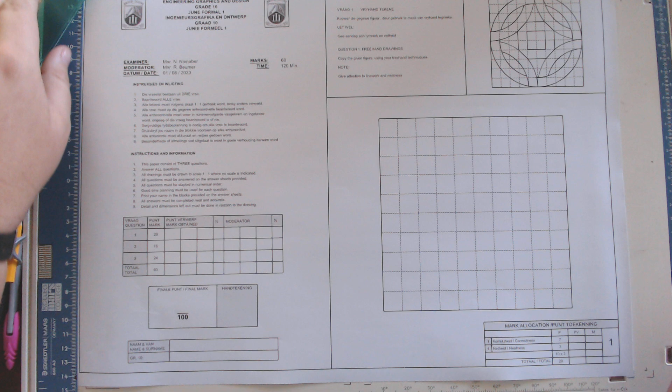So today I'm going to go through an old exam paper of a June exam for grade 10 EGD.

If this is a 2 hours paper, you can practice this and you need to time yourself and see if you can do this in 2 hours. If you can't, that means you need to learn how to do it faster. If you don't practice EGD regularly, that means you're not going to be fast enough in the test.

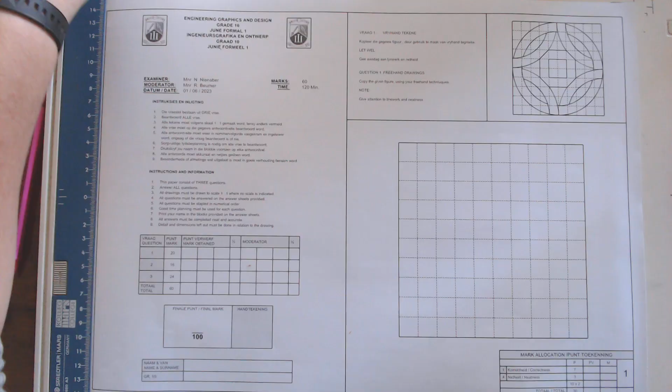For the freehand sketch, you don't use a ruler, you don't use a compass, you use nothing at all. That means you can't use a compass, you can't use a protractor, can't use a ruler, nothing. You can't even use your compass just to get measurements or something. You're not allowed to, okay?

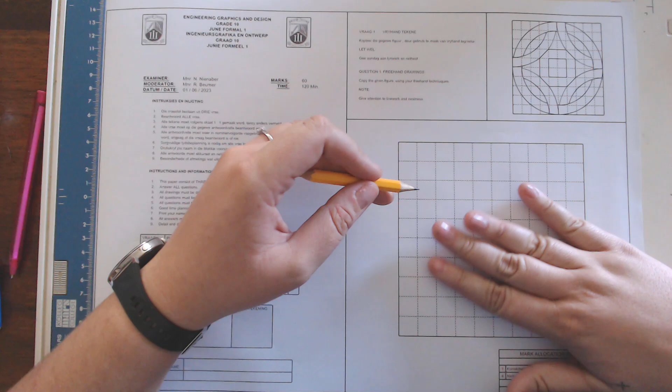So be very careful, we can see things like this very easily.

Now with the freehand, the most important thing is what I usually do, and I recommend you do it as well: you number your sides on your question paper as well as on the paper that you have.

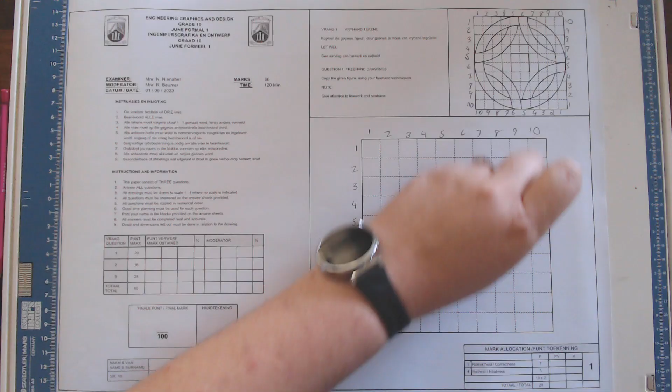Okay, I did it quickly. I didn't do the edge on the side because it's going to be the same thing. I just wanted to explain to you more or less what you need to do.

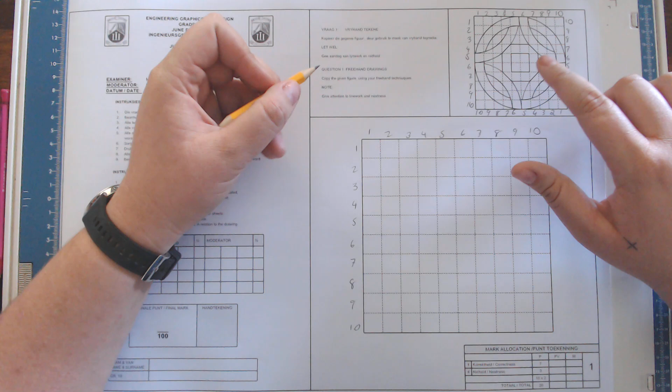Now especially with something that is so complicated with a lot of round edges and things like that, begin in the middle, because that part is straight, it's not difficult.

Now look at your lines, this is the 5 line and this is the 5 line. So I look here, 5, 5, meaning this is where my corner should be, and I can just carry on drawing like this. Now please be careful.

Okay, I'm going to show you the mark allocation now. Please be careful, I drew this in one line, okay? I don't want you to go over it like this, or try to do it like this and then it looks wrong, and then you erase it and I can still see it and you try again. Just do everything lightly if you need to, to start off with, and then you can go darker if you must, okay?

So is that okay, good. Now when you do the curved lines, the easiest way to show your technique is to draw the beginning, middle, and the end of the circular form, the shape.

So let's say I'm going to do this angle here. So I start at 6, I'm going to make a little mark here at 6, how it looks, so it goes just a little bit like that. I'm doing it very dark so you can see, but you should only draw one line, by the way.

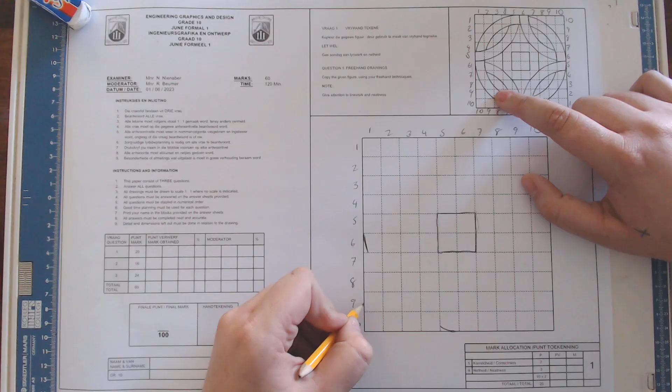So now I know I need to connect it. And then I look at the 9 here, the 9 and the 9. There's from one corner to the next. So now I know how to do that. And now all I need to do is connect these lines. That's it. Okay, so that should be more round, but anyway, that is basically how it looks.

Now let me show you the memo. When you work with the memo, this is how we'll get it. And we'll put your drawing on top of this with a light shining from the back. And that is just easier to see if you are on track and everything like that.

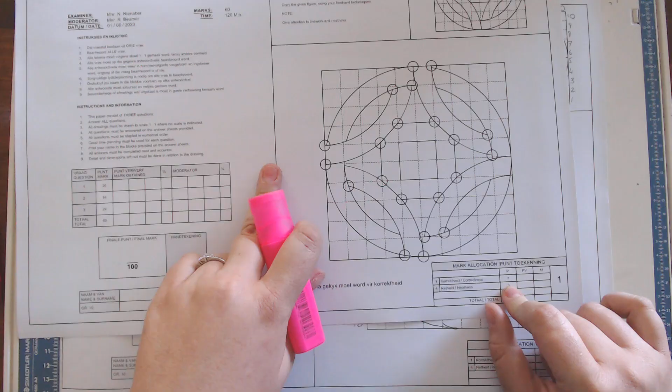Now, if you look at the mark allocation at the bottom, it says correctness is 7. Okay, so when I count up all these marks and things, I think it's going to be half a mark for each area here. Then it will add up to 7. So if you make one mistake, it's fine, it's half a mark, but 2 mistakes is 1 full mark. All right, and everywhere where there's a circle, that's where I look for the mark specifically.

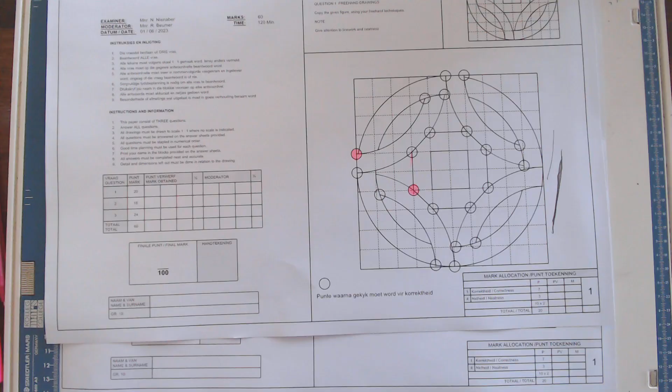Alright, so in this case, this question paper counts 3 questions. The first one is 20 marks, it's the freehand. Then the second question is 16 marks, and the third one is 24. So if you need to allocate your time, try and work with the biggest one taking the most time, and the smallest one taking the least amount of time.

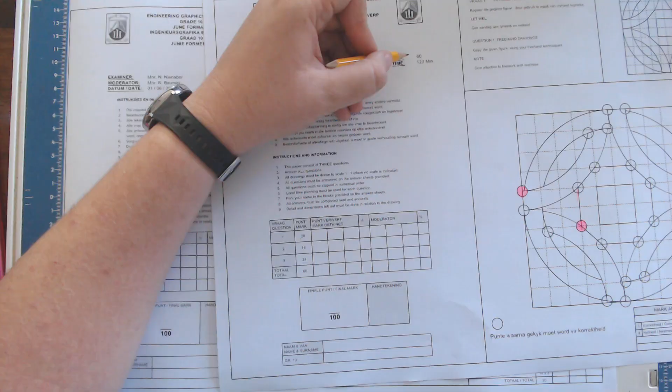And it is actually about technique, right? So you need to exactly know how to execute something in order to save time and not waffle and make a mistake. So as you see, it's 60 points for the question paper, but it's 120 minutes, so you get 2 minutes for each point. And then you can work it out like this, basically.

So, let's say, this one that counts 24, you're going to have 48 minutes to do it. For this one that's 16, you have 32 minutes to finish it. And then this one is 40 minutes to finish it. Okay, and that's how you kind of calculate, and that's why it's important to keep an eye on the time, and to quickly work out how you're going to do this.

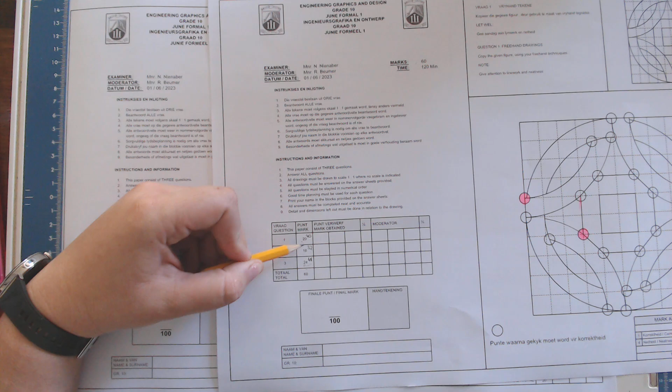All right, you have time. When you do the reading and everything, you have time to see, okay, I'm going to take more time with this, or this is going to be shorter. And also, if you look at the marks, there is a 4 mark difference between these two. And then there's a bigger jump between these two. So, meaning the drawing here, question 3, should take the most time. But not too much, because the others also deserve at least half an hour.

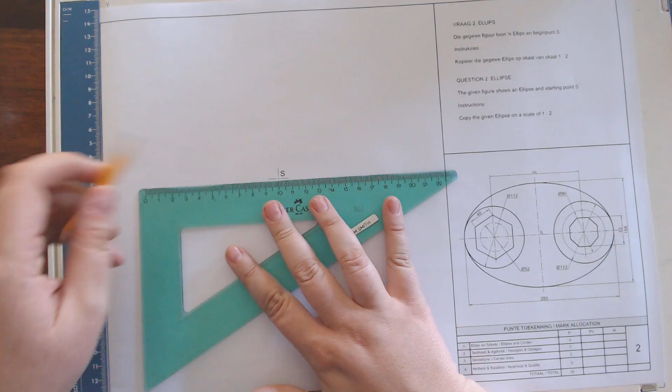I'm just going to do it before I look at anything else, just so I don't forget it. And accuracy is important in this case.

Okay, so it says here, the given figure shows an ellipse starting point at S, so there, and I know that's where my drawing starts. Instructions: copy the given ellipse on a scale 1 to 2.

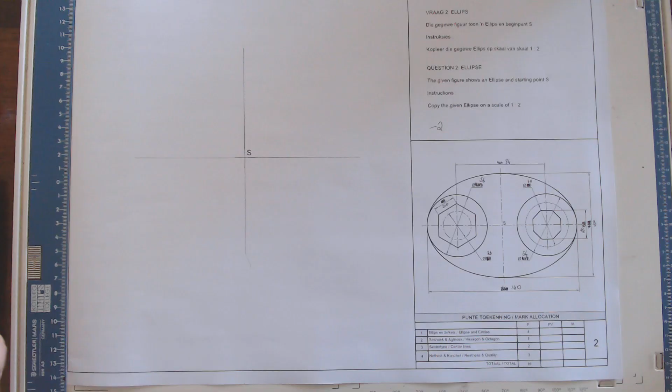Okay, I got it now. So let's get going. First things first, I am going to draw the ellipse itself. It takes the most time, but it's the easiest thing to do once I have it.

Now, because it's 140, that means 70 on each side.

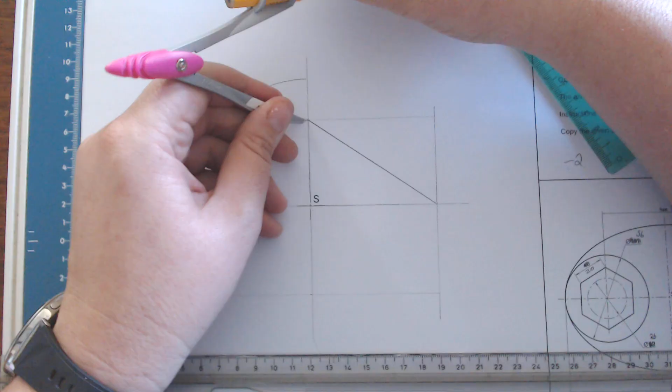Now remember, these circles and all those things, it's really not that necessary. If you can, do it rather in construction lines. You erase it afterwards, because there are things happening on the inside of this ellipse, and if you have too many things it's going to confuse you.

Okay, so once I have my final ellipse, I'm going to draw it in pen, and then I'm going to erase the rest, just for my own peace of mind. There we go, I'm taking it that far.

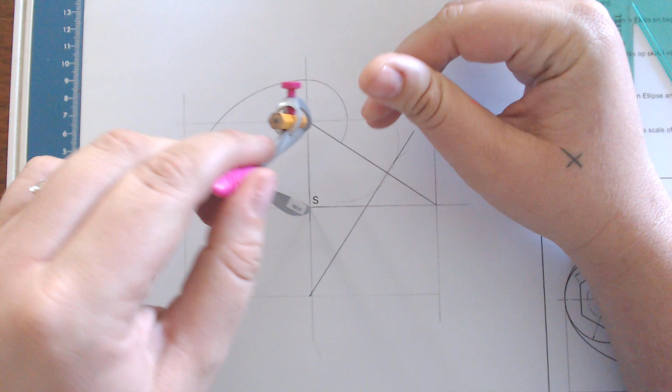Compass, pencil, there we go, on this side. Right, compass, there, pencil there, alright, okay.

Okay, there's my diamond, sharp point, pencil.

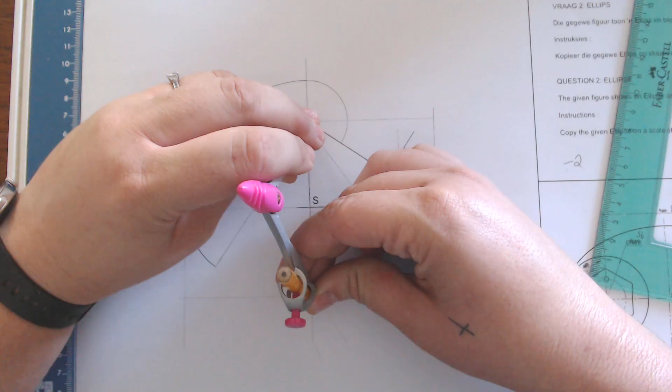See, my measurements are not working out now. It's fine, whatever, it's fine.

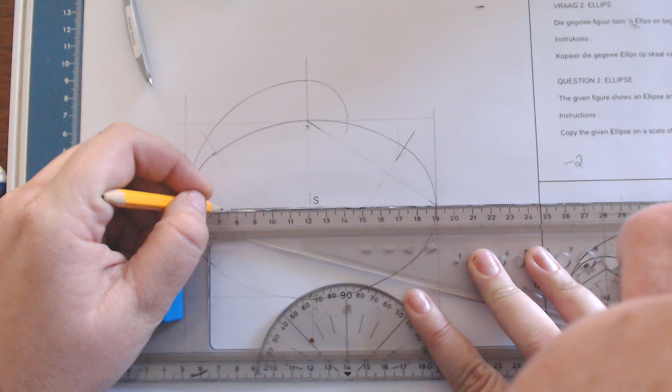So I'm just going to skip ahead and draw my center line so long, because I'm going to use them the whole time. So why not just, you know. The line from the top.

Okay, there we go. There's my center lines. All right, now remember your center lines in the end as well.

Okay, I'm quickly going to draw the two circles, 56 diameter. When it's 56 diameter, it is going to be 28 in radius. So I'm measuring 28 from the side.

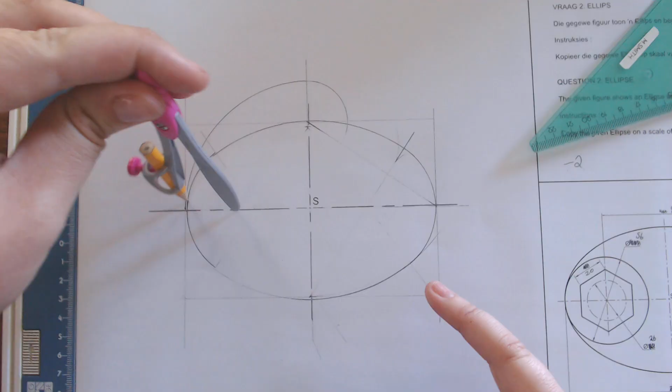I'm cheating a little bit, because they do give you basically the distance between the two circles here, but I know it's going to be overlapping with my ellipse, so I'm just trying to kill time. Alright, and on this side as well.

Oopsie, see, that should not be happening right now. There we go.

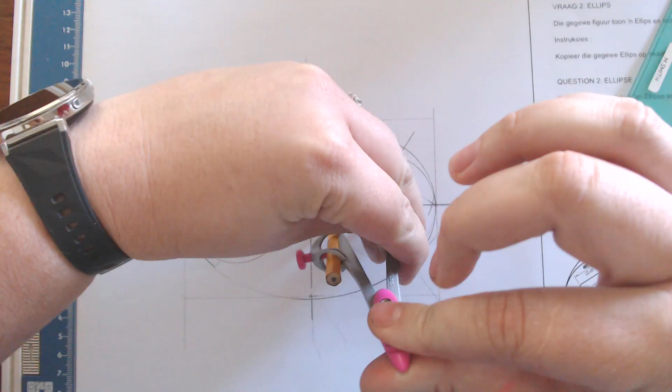Okay, quickly my center lines, because I'm going to use the same center lines the whole time. Short, long, long. Okay, and short, long, long.

Okay, now next step, I'm going to do the hexagon. So if my side is 20, put your compass on 20, sharp point in the middle on your center line.

Okay, and then you are going to draw your hexagon on the inside.

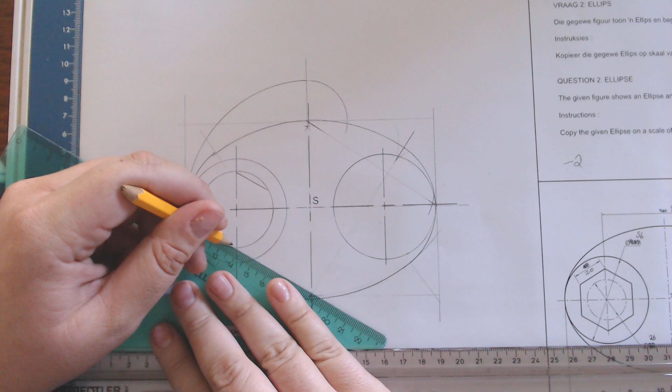It's very ugly, it's not matching up, but it's fine, whatever. I'm doing this for test purposes only.

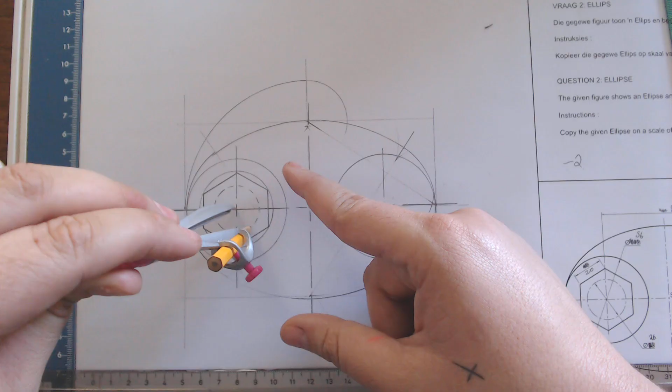Alright, center line's done. Ooh, that should have been long, short, long, short. You see, that's what happened when I rush. I'm trying to get through this video as fast as possible to not waste too much time teaching.

That should be long, short, long, short. Okay, center line. Okay, next step, the hexagon. Where's my other set square? The set square I'm going to use on the sides of this hexagon. Okay, it's 94 in total, right?

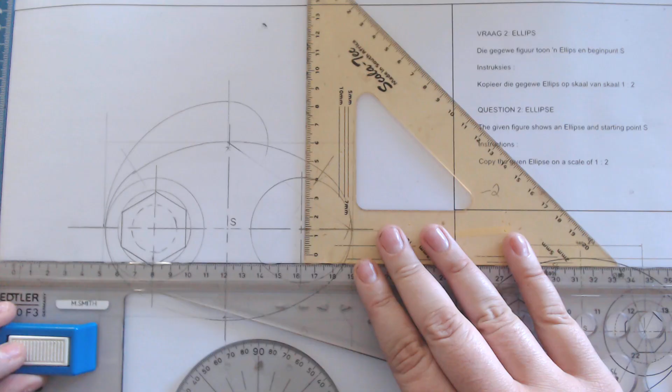No, sorry, it's 26. So it's 13 on each side. I'm quickly going to draw my square. It's 13. There's 13.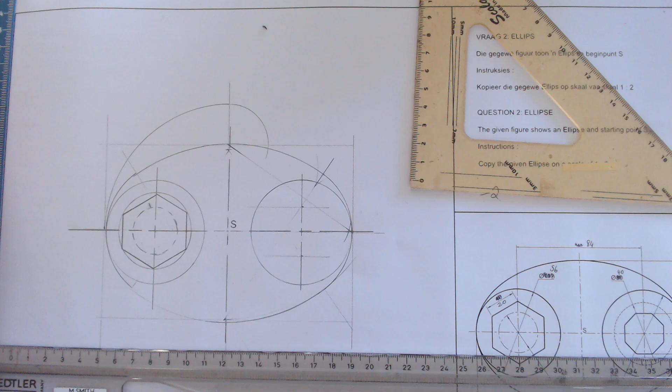26, right. Construction lines, alright. And then I'm going to work inside of this. Let me just do the side as well. It's also 13 and 26.

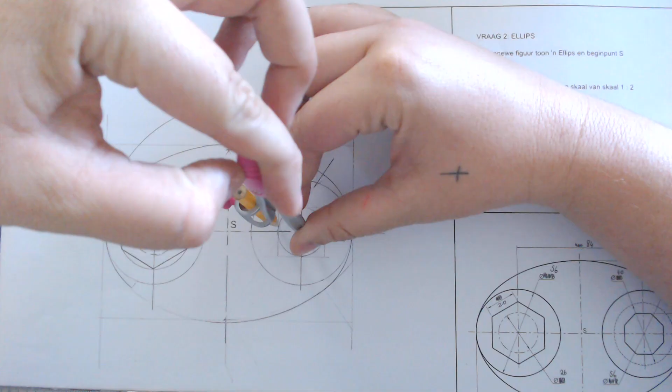Very light construction lines. It's not really crucial on all sides, but anyway, okay, now let's use our set square where they touch. That's where you draw your octagon.

I'm trying to think, okay, let's do the center lines, the hidden detail lines. So diameter is 40, so radius is 20. This one is actually hidden lines.

Now it's equal. I'm going to mark this as if I was a teacher, with all the mistakes and everything I made and all the mess and things, just to show you that even if you did the complete drawing, like properly, you can still lose quite a lot of marks.

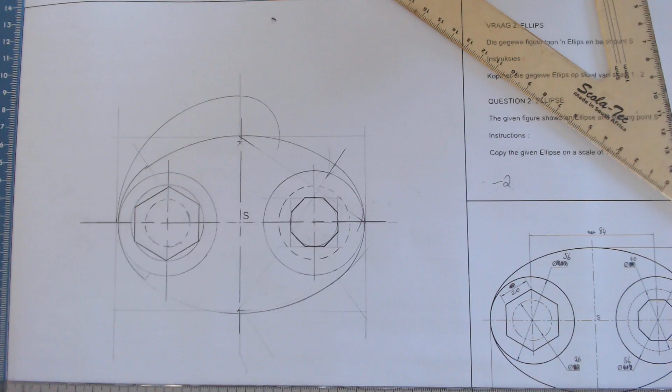Right, there we go. Okay, anyway, let's act as if this is a completed drawing. I'm going to get my memo quickly, and then once I show you, I want you to see how I would mark it step by step.

Okay, that is the question paper, here's the memo, there we go. So you'll see, it's already on the WhatsApp that I sent you with the test, but okay, I'm quickly going to go through it.

So these 2's mean that's for 2 marks, 2 marks, 2 marks, 2 marks, 2 marks, 1 mark for the circle if it's good, and it should be - in this memo it's actually incorrect. This should be center lines, that should be a hidden line. Okay, anyway, let's move on.

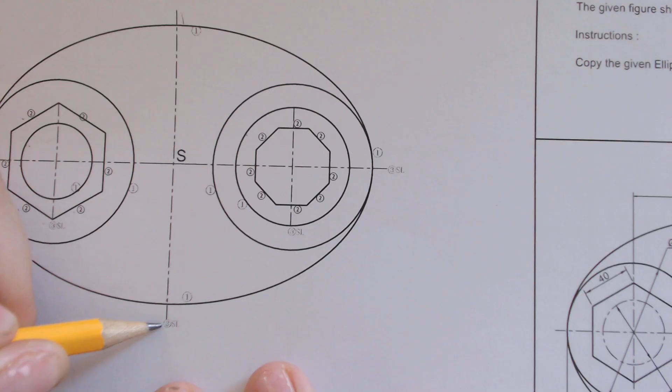So 1 mark for your ellipse if it's right here at the top, 1 mark for here at the bottom. You'll see there is 2SL - that stands for 2 marks for center line. So if you look at the mark allocation, the center lines is 2. Alright, you get 1 mark for over there.

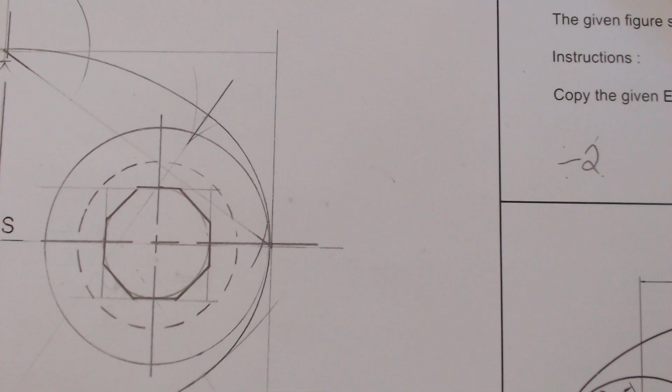I look at that. I look at the center line that you give here, center line that you give here. Alright, so let's quickly have a look. I'm going to mark it very briefly, just so you can see. Alright, so first things first.

Neatness - I would not give a good mark because the lines are different here and here. You see how dark and light it is? It is going over the measurement there. There is weird lines that's still remaining there, because I erased it. There's weird lines still there. And the thing is, it's a neatness issue because it's just as dark as my actual drawing.

So even though it should have been construction lines, I would look at the lines here that I made. I mean, there's just a lot of nonsense going on. And over there, it's unneat. Alright, if I was strict, and I kind of am, I'll give a 1 for neatness. Okay, 1 out of 3, it's not good.

Then your center lines. I'll give marks there, and that counts 2, for center lines.

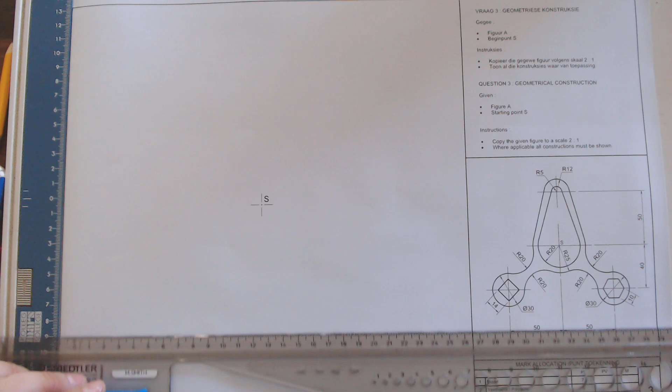Okay, granted, I didn't do the freehand drawing completely. First things first, let me just get this set square out.

It says there, they give you the figure A, that, and starting point S. So I know that's S, that's where I start.

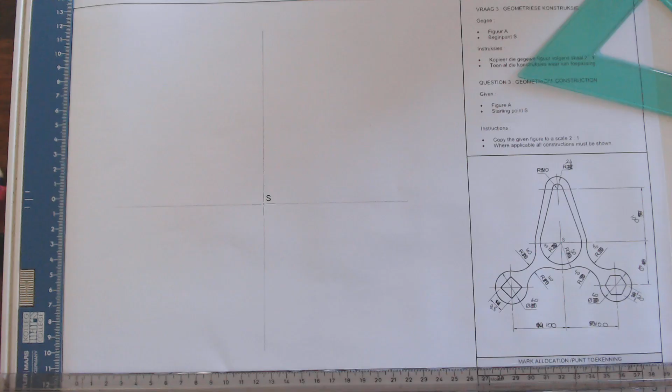So I'm going to start with this circle that I have here, radius of 40, so I'm taking my compass, radius 40.

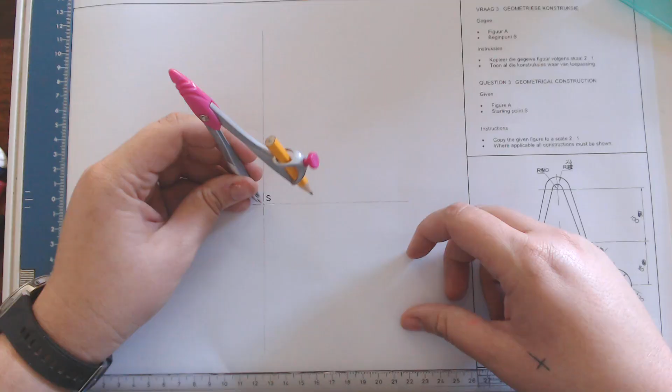I'm going to do it lightly first, so I can erase it if needed and where I need it. So there we go, that is 40.

And now I'm going to do the top one. Between the top and S is going to be 100, so I'm measuring 100 quickly.

Then I'm going to do the radius of 10 and 24. Well, first I'm going to do 10 because it can match up with the circle I just drew. That's very small, I hate small circles.

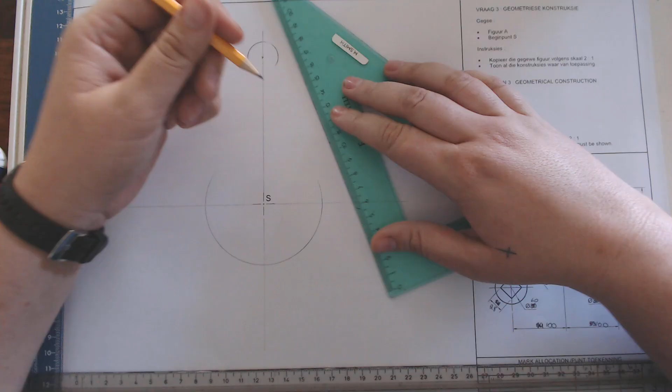Now to connect them, what I'm doing is taking my ruler, trying to keep it wherever I touch the circle, and I put my pencil there just to keep my ruler in the right place. There we go, I see, okay, it's going to touch there. And all I do is draw a little line now.

To connect them, now I can erase that part. Let me just get my small eraser. There we go, that's it. And you do the same on the other side, so ruler wherever it will touch, the furthest part of a circle, and the same on the other side.

And I'm just drawing it. Okay, and now erase. Okay, I'm going to mark this one as well to show you what I would look for. All right, so just to score some points for myself, I'm going to make this a bit darker. Oof, that's very dark. It's fine.

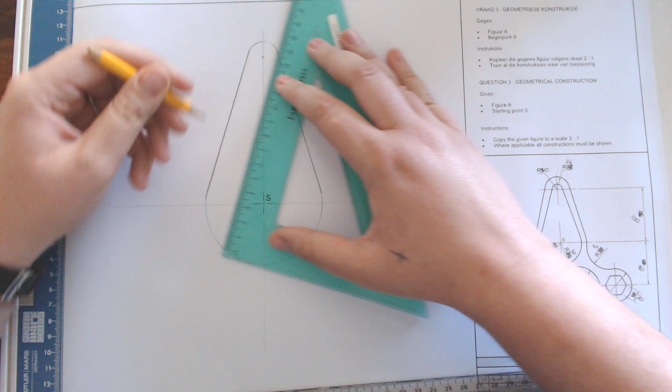Let's do this. That's what I want. And then I want my circle darker as well. I hate doing my circles twice, because it's never exactly on the right spot. So it's a big gamble to do it like this, especially in pencil. Okay, but I think I got it now. Just to make it darker. There we go. Okay, that's too dark, but it's actually perfect for the video.

All right, now I should do that top one as well. For the sake of time, I don't really want to. Okay. Okay, there we go. Sorted. Kind of, I think. Yes.

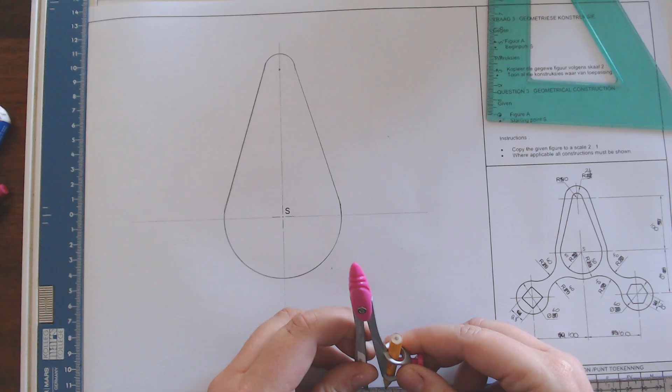Okay, I don't know where it's going to go. So, what I'm going to do now is I am going to try and draw the next one. Yo, guys, this is tricky. I'm going to act as if this is basically a circle.

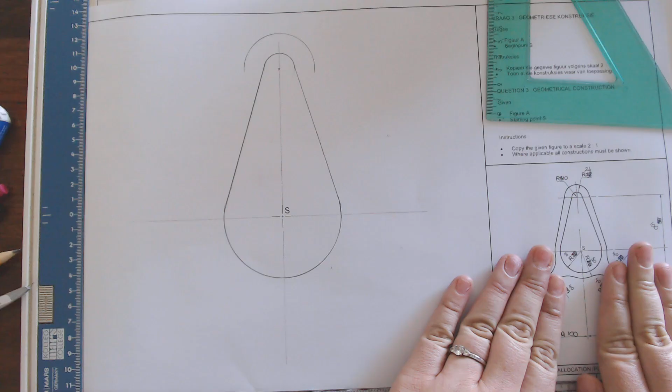Okay, so the radius is 50. 2, 3, 4, 5. Okay, center point. And I'm doing this lightly because there's going to be a lot of space that I need to erase. Right, okay, so now I can actually just try and connect this line with the next one. I've never drawn these tests before, so I'm trying to figure them out as I go along, just to be fair to you guys.

Alright, so if there's mistakes, my bad. Okay, I'm just going to erase this, because now I have it. I don't know where to stop. Okay, so...

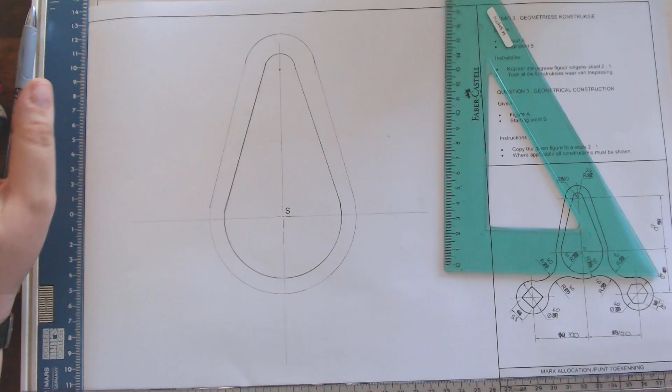Next thing, I'm going to draw tangent lines, but first I need to get these two circles on the outside. So luckily, I have the measurements, otherwise I would have a big problem on my hands. So I'm measuring... oopsie, that should not be happening.

And 20. Okay. Alright, just want to extend my center line. There we go. Okay, so that is very big. Anyway, that's actually good, we want big. Alright, now from the center line down, it's 80.

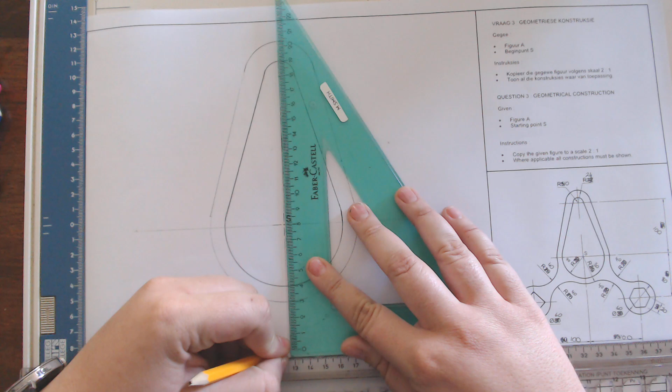Okay, now I'm going to draw light construction lines, so I know where to go. Need to go even further. Sure, okay.

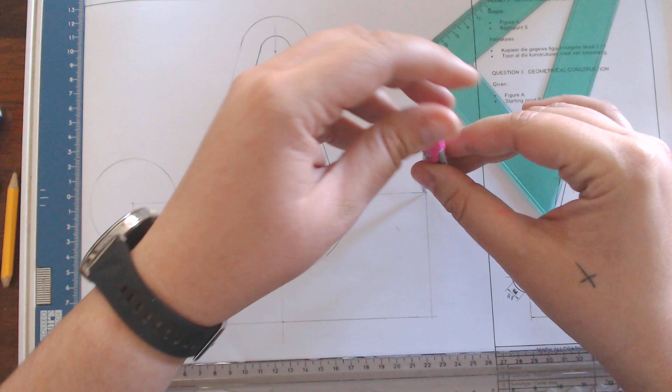Again, light circle first. It's a lot of circles that we need to do. With the exam, I suspect you won't have to do so many circles because it's not just the main focus. There's so many topics that you need to cover. I don't think you're going to stick with one. I think they'll all ask everything in one drawing, then move on to mechanical drawing with everything in one, then move on to an isometric drawing with everything in one. That's what I suspect. I do not know, but the rule is basically you need to cover everything in an exam that you've practiced for the term.

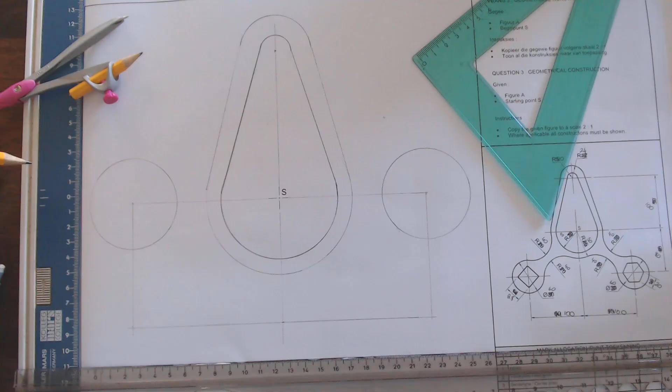Oh, guys, why didn't you tell me I made a mistake? Hold up.

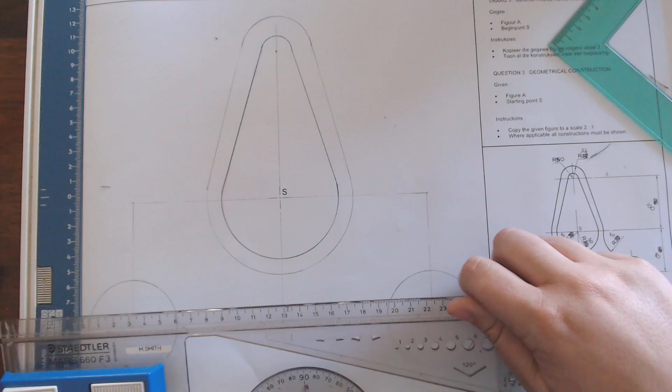Okay, now we've practiced this at the beginning of the year. Tangential lines, touching at the top. So remember, you need to get the center point from here to there, all right? And then once you have the center point, you can draw your tangential lines. And in this case, it is 40 radius, so compass on 40. Compass on 40.

Well, okay, hold up. First things first, we are going to act as if this is a circle, right?

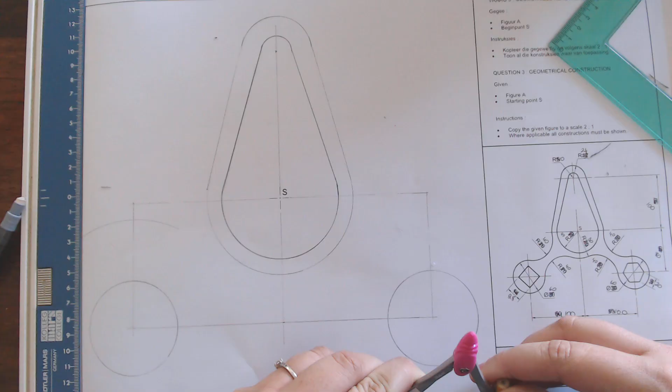So I'm going to add 40 with my radius, which is 30, so I'm going to put 70. Guys, this is massive. 1, 2, 3, 4, 5, 6, 7. And in this case, 40 plus the big radius is 50, so it's 90. What, 70, 80, 90. My poor compass is overworking itself right now.

Okay, sharp point at the center, pencil there. Now go back to your radius. 1, 2, 3, 4, there we go. Okay, there where they touch. There we go, voila. Okay, now to the other side.

Okay, again 40 plus 30 is 70. I'm just going to start here because my brain doesn't want to do math anymore. 70. Okay, sharp point, pencil, sharp point, same. Okay, so 50 plus 40 is 90.

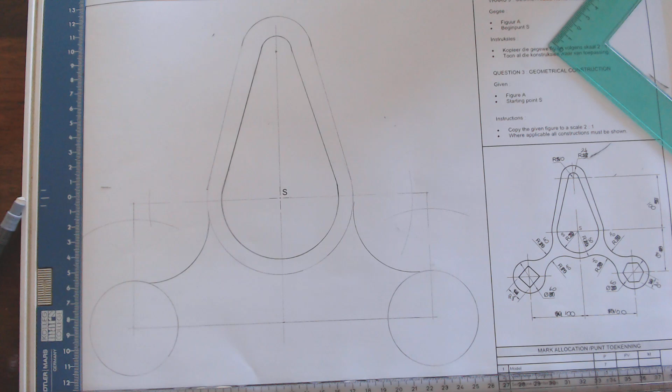Okay, goed, so is 40, radius 40, raakboog, tangent line. Okay, ooh, that is so ugly, but it's fine, we don't judge. This is a very, very bad move. Guys, this is why I don't like to do circles over and over. Okay, anyway, whatever, this is it. Okay, so I would lose marks for that catastrophe that I made there.

Okay, now this is going like a loop on the inside. So next step, I'm going to do the insides, well the bottom part, radius 40 again, same measurements. Okay, so I should have actually just done top and bottom at the same time to save time, but it's fine because, I mean, yeah, whatever.

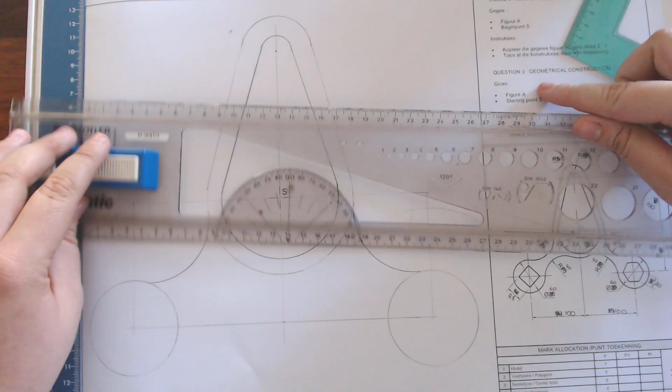Okay, bottom part, this is going to be a pain. We can do it. So you take 30 radius plus 40, 70 again. I'm just going to do both sides at the same time just to save time and my sanity. So let's do 7, okay, 7 and 7. The other one was 90-ish.

And then go back to 40. Sharp point, pencil. Gosh, this is ugly, I don't like this drawing at all. Okay, and the same on this side. That's fine, okay, I'm going to try to do damage control. Hold on, okay, I kind of tried to do damage control. Let's just quickly fix this bottom part. It's going to bother me. Oops, ish.

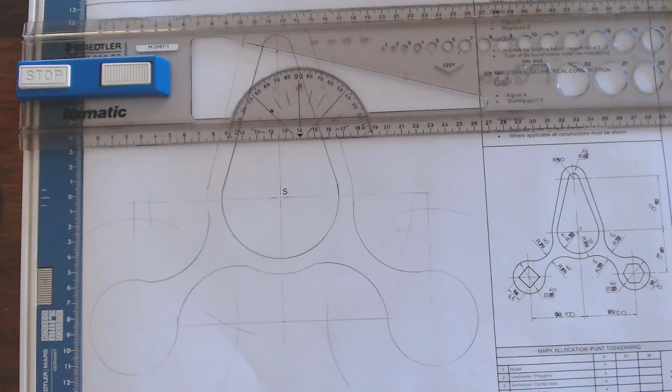Okay, so it's a very tricky one, but it's fine, you can do it. Next step, I'm going to quickly do the hexagon and the square and the hexagon in here. So hexagon, sides 20. So center, circle.

Okay, that's my circle, very light, that one. Okay, and then I'm going to quickly do the sides, 20. Yeah, it is still 20. That's good.

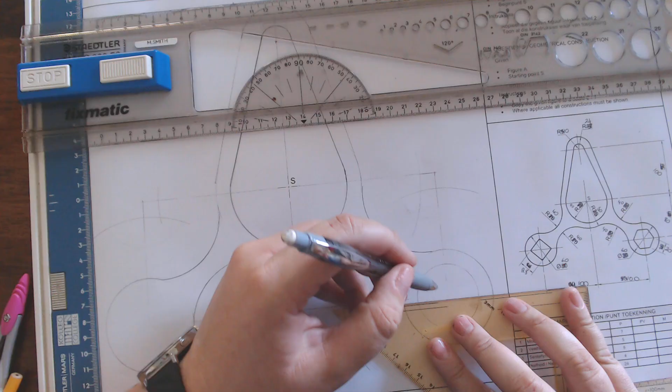Okay, and then I'm going to do center lines first, because I don't like doing it without a center line. I don't know, it's something that you learn. It feels weird to not do a center line. That's EGD for you - if you practice it enough it becomes such a habit. If you don't do it right, you feel it in your bones.

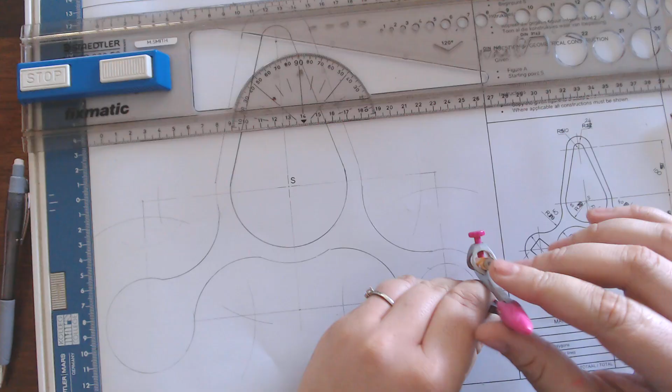Okay, so from this corner, up, going to be 20, and down 20. And from this corner down, and from this corner, upward. There we go. Okay, let's quickly draw the lines. There we go. Okay, it feels weird and it looks weird because this one's bigger than this one, but that's fine, we just trust the process. Okay, welcome to EGD, okay, 28 sides.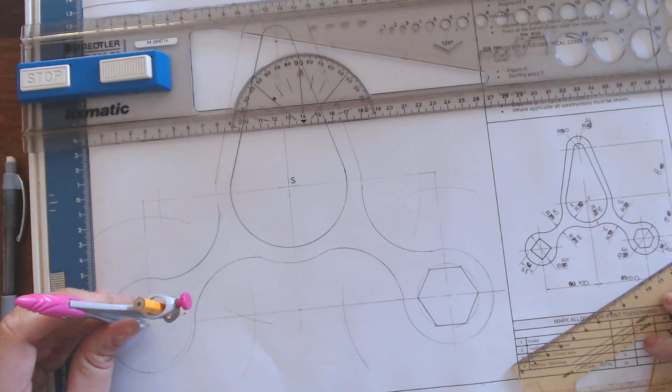So, 28, excuse me. Circle. What? You see, that's a stupid mistake. Okay, so I don't know why I did that anyway.

Center lines. So you can't be lazy with EGD, otherwise you take shortcuts and it's a mess, and then you make stupid mistakes and just dumb choices with your life like this. Okay, thank goodness that's sorted.

I'm just going to cheat a little bit, guys, because okay, sides are 28 now, and it's like a diamond. So all I'm doing is checking where my zero is. To where must I go to get 28? Easy peasy.

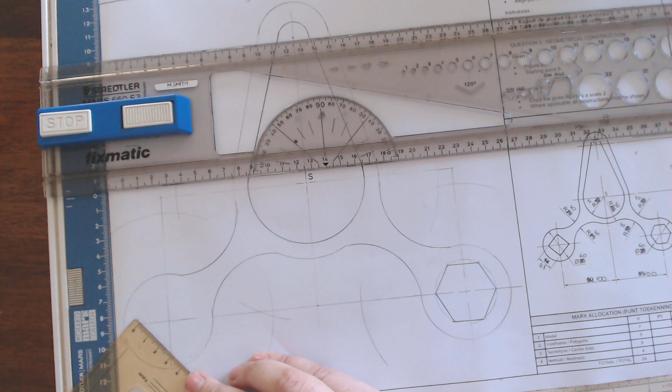I'm making such a mess right now, but it's fine. Whatever. I'm trying to make mistakes, especially so you can see. I'm doing this for you guys.

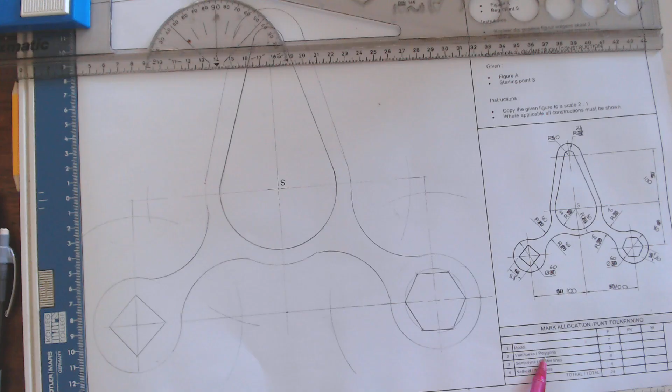The drawing. Okay, polygons, these and these. 5 marks. Done. Center lines. These insides, 8 marks, guys. And then neatness, okay, is for overall.

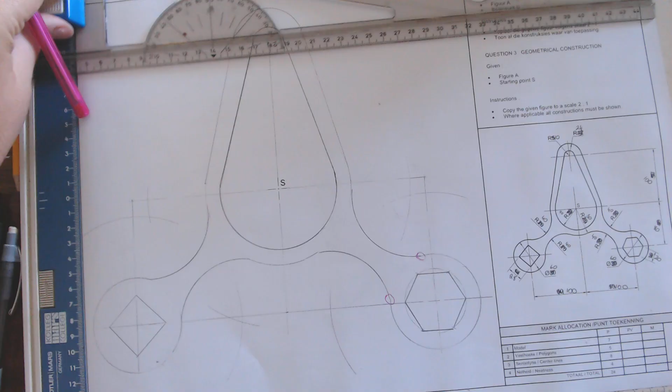Okay, so let's have a look. I'm gonna work with the neatness first. If I look at my neatness, the lines are not the same measurement, the same darkness. This is way darker than here. There you can see the lines are not matching up. That's neatness, it's not flowing. Over there it's terrible. Then over here you can see there's overlapping of lines, and over here you can see it's unevenly joined. And over here you can see I went straight, and there I made a mistake.

And of course over here, over there I match up my, we're not talking about those. These are very ugly, but it's fine. Okay, so those circles, that's what I would kind of penalize you for. And I mean, this looks bad. Like you want neatness, you want kind of nice drawings. It needs to be pretty.

Okay, so for neatness, I would give it a 1 or 2. You know, it could definitely be worse. So, I mean, let's give it 2.

Then center lines, 0, because I didn't do any center lines. These light lines are not center lines, they're construction lines, firstly. And secondly, if you do center lines, the short, long, it should be darker than your construction lines. It should be B-type lines. So a good example is, let's say this is an A-type line. That is a B-type line. That is a construction line.

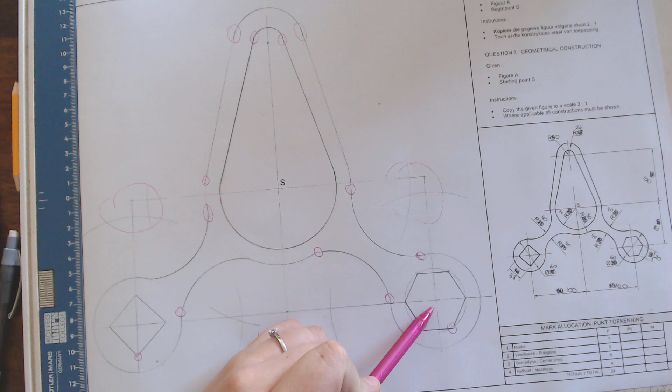Okay, so I would give myself 0. I mean, there's nothing. Okay, maybe there's a little bit here. So I would give 1 if I was nice. Okay, 2. Okay, then the polygons are not so good.

Okay, depending on how if you look at the memo, let me show you the memo quickly. I mean, look here, 2, 2, 2, 2, 2, 2, 2, 2, 2, a lot of 2s, a lot.

I mean, yeah. Okay, so and the center lines it should look like this. I mean, massive difference from how I drew it to how it should look. And also, ooh, this is tricky. This is very nasty. There's actually also a center line. That line is the center line, by the way.

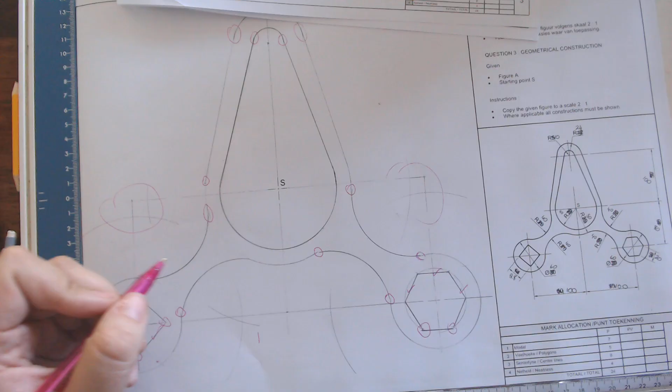Okay, so even if you didn't do the here, or here, no center lines, bad marks. You know, this is fine. I would give you, that's fine. Then it looks bad, but anyway. 1, 2, no, that's terrible. 3, 4. Okay, I would give kind of 4 marks, more or less, for those.

All right, this I would give a mark for, but the lines are very badly done. So, yeah, if I would mark this, and I'm being nice, I would give like a 50%. Because, yeah, it's not the best. It's also not the worst.

All right, but guys, this is average. It shouldn't be looking like this. Right, like you saw, I rushed.

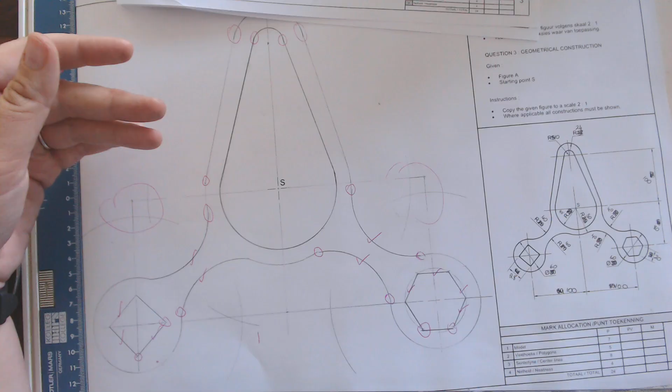If you want to hand in a crappy drawing like this, maar as jy actually 'n goeie punt wil hê, moet jy tyd spandeer aan hierdie goed, en dit moet netjies lyk. So, I hope you guys understand what's going on, and I hope it makes sense.